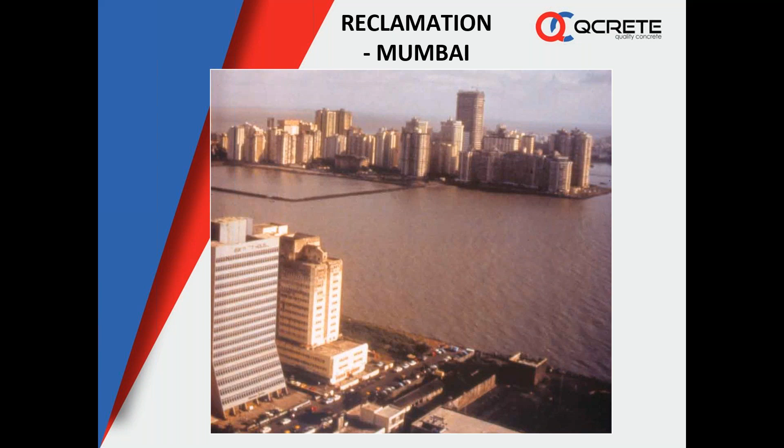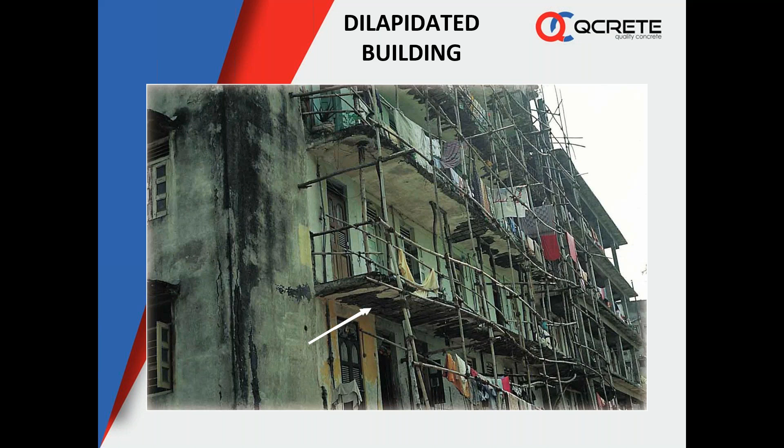And with those materials, with that type of quality of materials, we did the concrete. Now after 20 years or 30 years or 40 years down the line, we are bearing the brunt, because we can see a lot of repair and rehabilitation work. If you go around Mumbai, you can find a lot of repair and rehabilitation works, or sometimes it is being demolished also, because repair and rehabilitation becomes very costly. So it is happening there because of the poor quality of material availability, including cement, and even our specification was not ready to deal with that one.

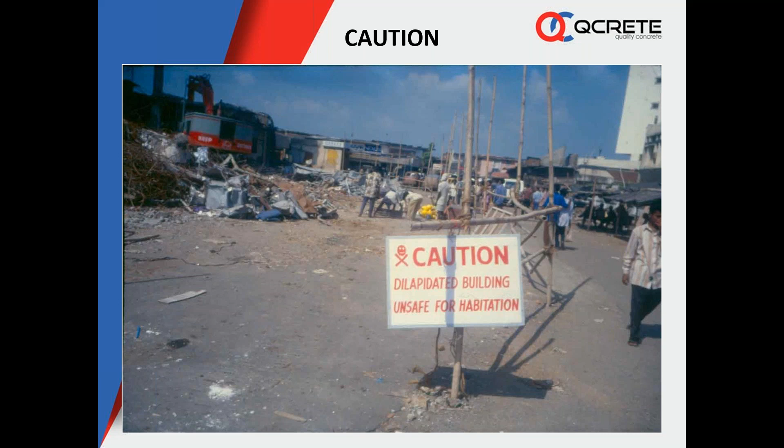Now I'll be discussing a few of these collapses which have taken place earlier, but nowadays we can see a lot of news coming up, a series of buildings getting collapsed. It's not a very old building, maybe 5 years or 10 years old. You have been listening in the newspaper. So whenever any building collapses, like this particular building, like Poonam Chambers only, in the 1980s, showing a picture of health there in the building, but it is not of the building, but of a company which was housed there.

So whenever any building collapses, a lot of rumors start. Earlier in the 80s there was no mobile phone, so people used to call up and tell that such and such building has collapsed, and then rumors start floating all around the town, and then slowly the municipality will wake up, and then they will institute a committee to go into the details of why this particular building has collapsed. The committee goes, examines, a detailed report is prepared, and then it is submitted to the municipality.

But has anybody heard any report coming out actually? We'll never find out the reason why this particular building has collapsed. All the judicial reports are being submitted, but it just gathers in the municipal office. Nobody bothers to reveal it actually. So what happens?

Buildings after buildings keep on collapsing, because the next building which is also prepared doesn't understand, and they create the same mistake, or some other mistake is created, and then the building collapses. Recently in Bengaluru, a few buildings have collapsed. Some committee has been set up to find out why, and I hope that inquiry report will come out.

Now this particular Poonam Chambers building had collapsed. Somebody said it is a 20-year-old building and it collapsed because of poor maintenance. Somebody said it is poor structural design, or somebody said that there was an overhead water tank there, and if somebody filled it with water, it collapsed. So all those rumors started floating.

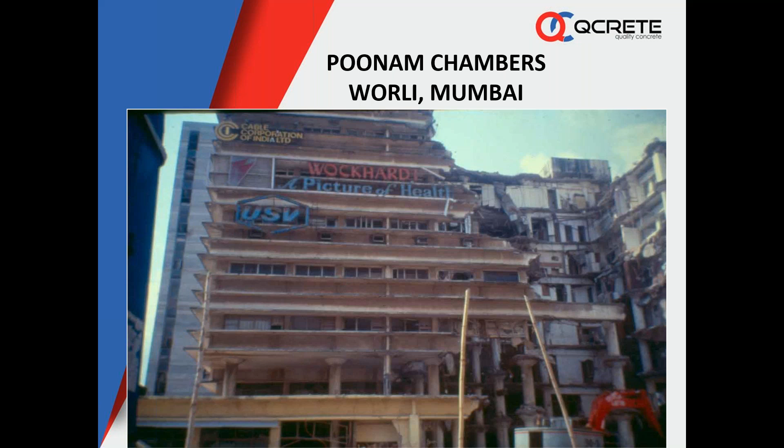So what can happen? Nothing but, on the 4th floor, when the entire configuration of reinforcement has been changed, the entire concrete building has to collapse. So this is one of the reasons why this particular building had collapsed.

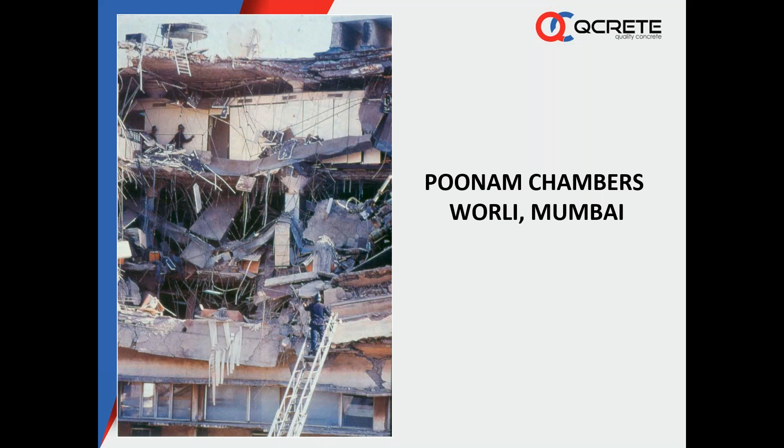Now you can see here is another view of that one. About 4 or 5 people had died in this particular collapse, including one young architect who had come to visit her friend. It collapsed during that time, and she also died in this particular collapse.

Another building I'd like to highlight is Shiv Chandan, Andheri, Mumbai. We got a call from a friend who was staying opposite to this building, built by the same contractor, because this building had already been declared unsafe and was on the verge of collapse. He was panically calling, asking what to do.

In this particular building, it's a 5-story building. On the ground floor, a bank was housed. As usual, in the morning when the bank employees came to work, there was a creaking sound coming from the building, as if it was made of a wooden structure. The employees refused to work and started complaining to the manager, who said, no, they are all making bahana, go back and work. But the employees refused to work.

They called the municipal office. The officials came down, inspected the building, and found that it was unsafe for habitation. Once a building is declared unsafe for habitation, it is mandated that everybody should vacate, because it can collapse anytime. Everybody vacated this building, and since it's a high-story building, the neighborhood was also asked to vacate.

A bakery fellow who had made enough dough thought he would make the bread and move out. Poor him - he and his 5 workers died in this particular collapse.

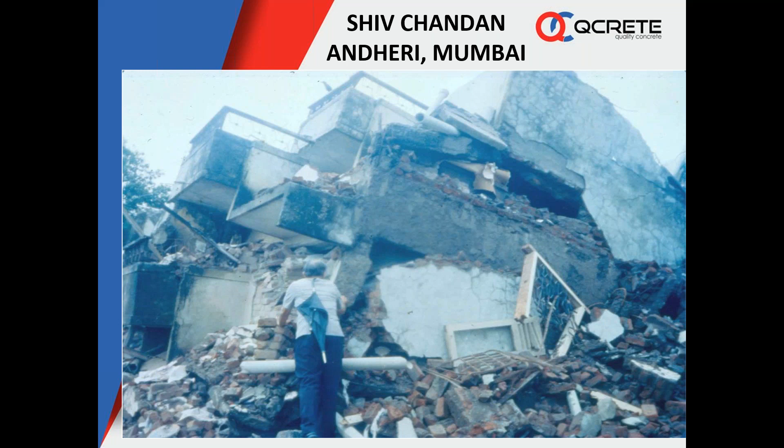So it's very important to understand the foundations, and whether the builder is going through the entire technical process for building a particular 5-story or 6-story or high multi-story building.

Now this is another building which has collapsed, Gangaram building in Bengaluru. Here the basement and first, second, third floor was already functioning. As usual, might be because of this building boom time, he also thought he will make 4th, 5th and 6th floor.

So 4th and 5th floor had been cast. When the 6th floor was being cast, concrete was happening, and the entire building collapsed. Since it was a live building, Gangaram's own bookstall was also there in the basement.

Around 90 people were trapped inside the building. Luckily, landlines were there at that time. It was live, people calling, please come and help. We were there, but outside the situation, you can see building to building, the entire area is filled with rubble, and nobody could approach with our machineries. We were not that well prepared with machineries to do fast evacuation. It was very difficult, and by the time it was reached, all 90 people had died.

So here you can see slab lying over slab. So what has actually collapsed here? The supporting system has actually collapsed. You can see the slab is lying over slab. The entire supporting system has collapsed.

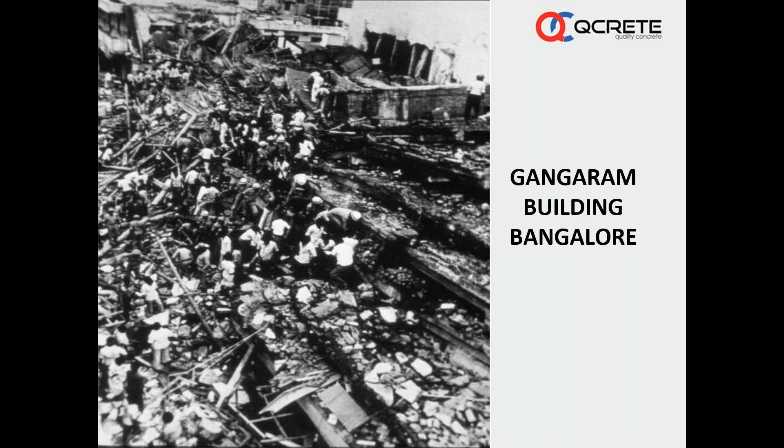So when we do supervision of a building, most of the time for the slab, everybody is there on top of the slab supervising it. But for a column, none of them is there.

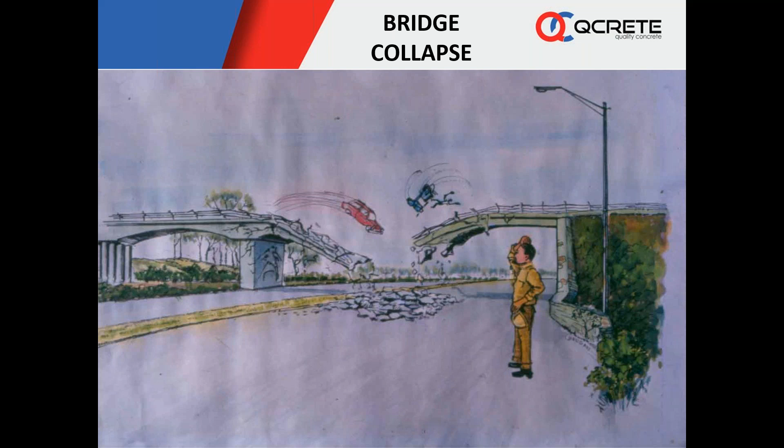Now you can see this young gentleman, a young engineer, after passing out of college, made a very beautiful bridge. He thought he'll show his grandson how beautiful a bridge he has made. Poor fellow, before he could even get married, the bridge collapsed. So such things have also happened.

You can see it's the Mandovi river bridge collapse. Here traffic was moving, and one fine day, you can see the bridge collapsed.

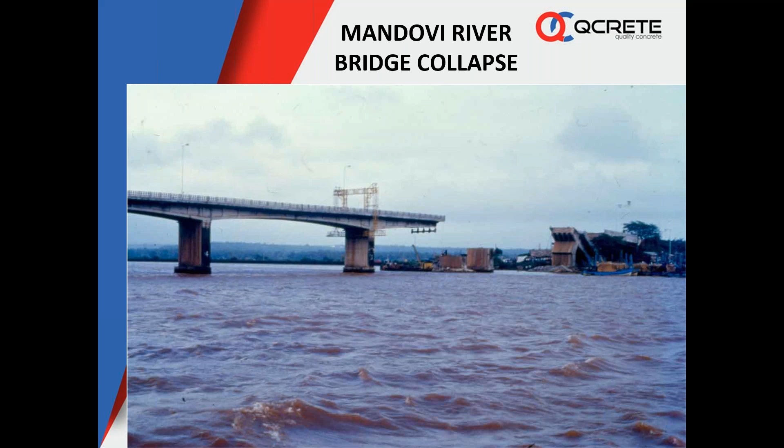And the reasons, you can see, are again pre-stressing cables. It is a coastal area, the bridge runs through the coastal area, with highly extreme weather conditions. We have to go for a higher grade of concrete, or we should go in for a blended one to avoid the corrosion effect. You can see the tendons are corroded, and due to that it gave way and collapsed.

Now let us understand why failures occur. There are 4 reasons to it: ignorance, greed, carelessness, and negligence are the 4 reasons why collapses take place.

Like ignorance - if you are an engineering student, during college itself you should attend various seminars where experienced people come and speak. At that time we don't give that much importance, but to remove your ignorance, that is the best way, since they give it as a capsule. So go through that, work for it, and you can remove a lot of the ignorance part after you come out of college and start working in the field.

Next is greed, which I did not explain because it is synonymous with civil engineering, and due to which there are reasons why some of the collapses are taking place.

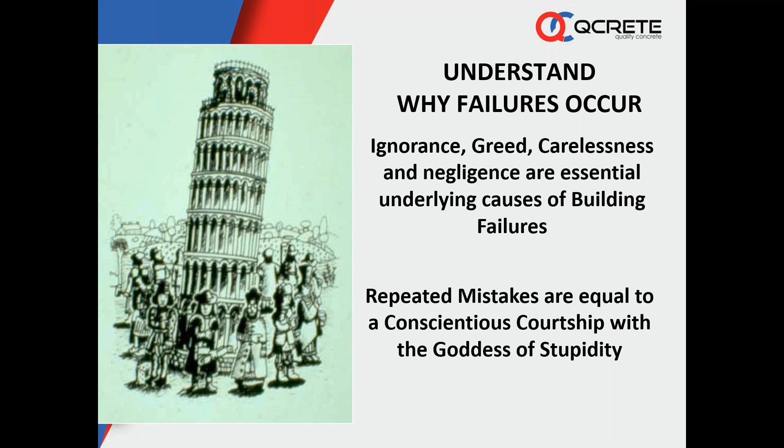So some of you understood, some of you have discussed how to solve the concrete problem. Some of you haven't actually. So shall I proceed with some of the elementary things we should look into for producing quality concrete.

The first step in concrete making is to make a good workable concrete. It is just like sending your child to a good school, a good college, teaching them good manners, good education. You are molding your young kid into a good human being. Same thing, you should know how to mold the concrete. How can you mold it good? It is by giving good workability.

Good workability means less entrapped air inside the concrete. So it will be easily able to place it, compact it, finish it. That is the purpose we have.

Workability and water cement ratio are two separate aspects. Even with low water cement ratio, you can make a highly workable concrete. Workability generally depends on the type of work. Suppose if you are doing road concrete, you require low workable concrete. For house work, slab work, you require medium workability. If you go for piling work, you require high workable concrete. So it all depends on the type of work; there is no connection with water cement ratio.

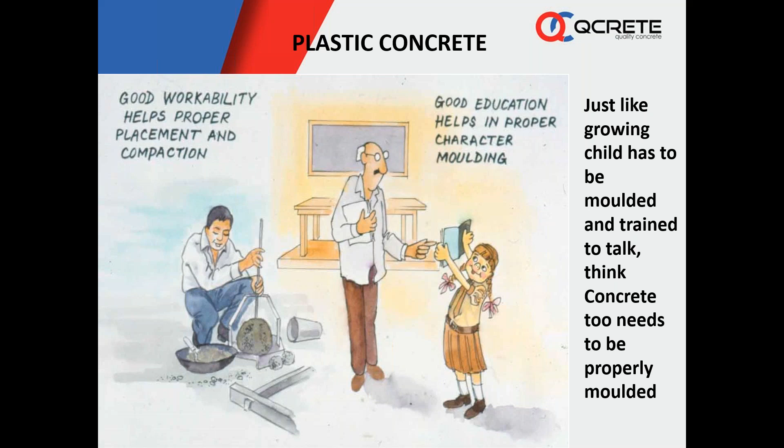Now if you see here, this concrete has a lot of entrapped air. You can see the concrete surface is not very smooth. The workability here is very low. It is very difficult to place the concrete, compact it, and finish it.

It's just like working under a boss who doesn't understand you. Either you should leave the organization, or you find a newspaper cutting, cut it, and put it on the boss's table so he sees it and leaves the organization. So there are only two alternatives. Similarly, if you are making concrete in this fashion, there are only two alternatives: either you stop making concrete, or you'll be making miserable concrete throughout your lifetime.

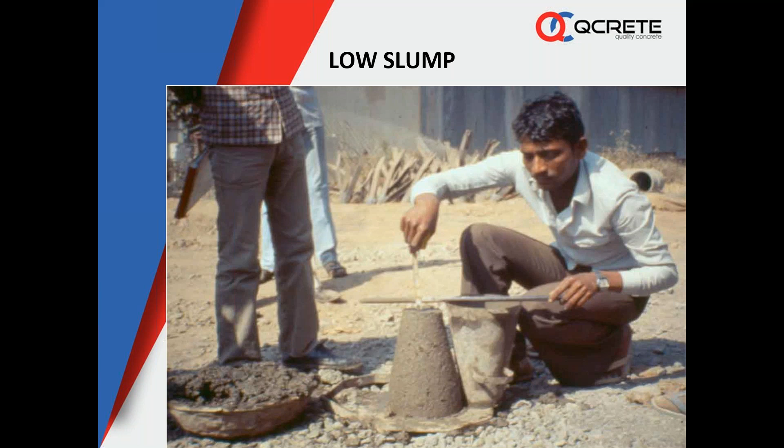Now, these are all inborn defects in concrete. You can see if you make concrete with low workability, you end up with segregation and honeycombing. It's a non-cohesive mix. A watery, lean concrete will all lead to this honeycombed, segregated concrete. You can see it here in the photo.

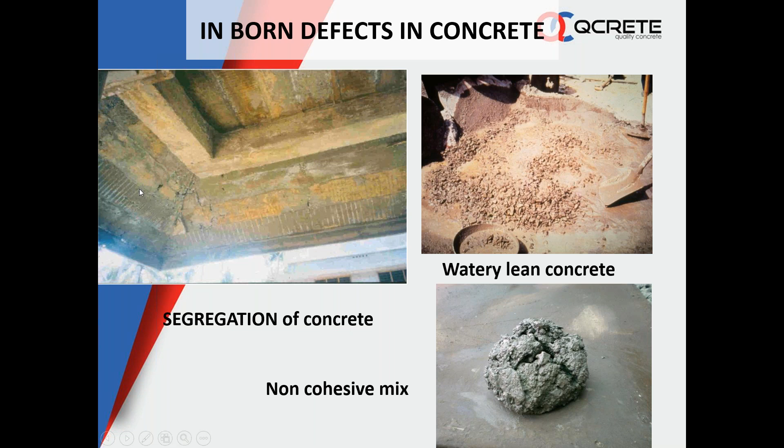Again, inborn defects in concrete. Now you've done the concrete, and the next day you come to the site and see the steel rods are exposed. It's not minor, it's major. Now what will you do? Natural tendency is to call the mason and ask him to plaster it so that before the client engineer comes, you can hide it.

But that is just putting powder on your face. Nothing is going to happen. In this aggressive environment, all the enemies of concrete will enter and attack the steel in that portion, which is the weakest portion where the honeycombing and segregation occurred. Water, moisture, along with chlorides, will enter and attack the steel, corroding it, making it the weakest portion.

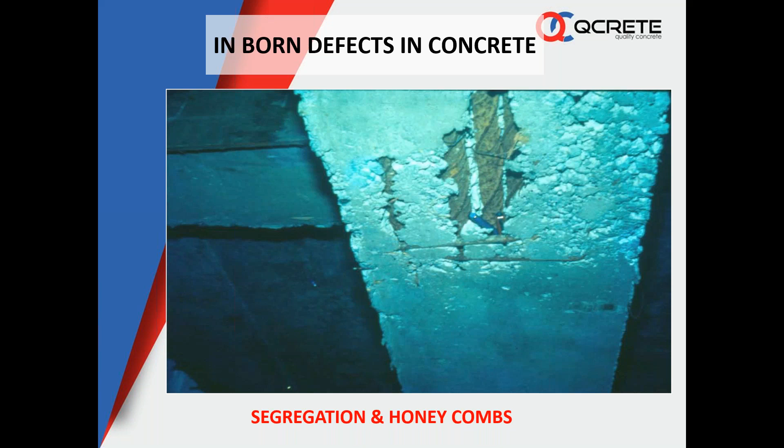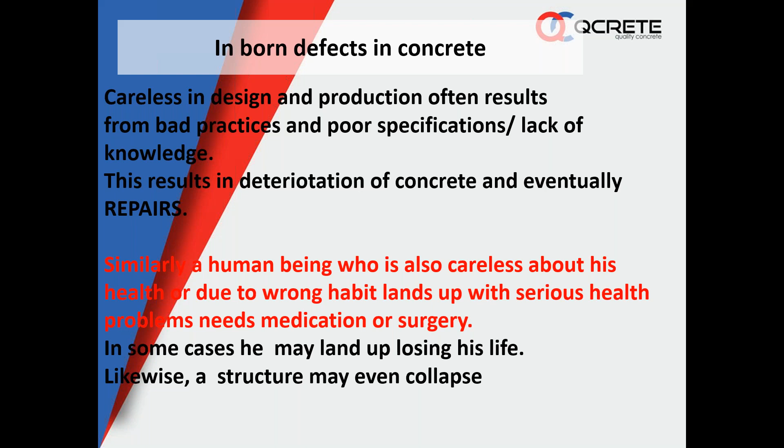So inborn defects in concrete, to compare with human beings, carelessness in design and production often results from bad practices, poor specification, lack of knowledge. This results in deterioration of concrete and eventually repairs. Similarly, a human being careless about his health or with wrong habits lands up with serious health problems needing medication or surgery, and in some cases may even lose his life. Likewise, a structure may also collapse. So right from design to production, to selection of material, to implementation at site and specifications, every part should be taken care of to produce a good durable concrete.

Same thing in concrete. Even though we have the best materials, if you don't know how to make a cohesive concrete, it can lead to segregation.

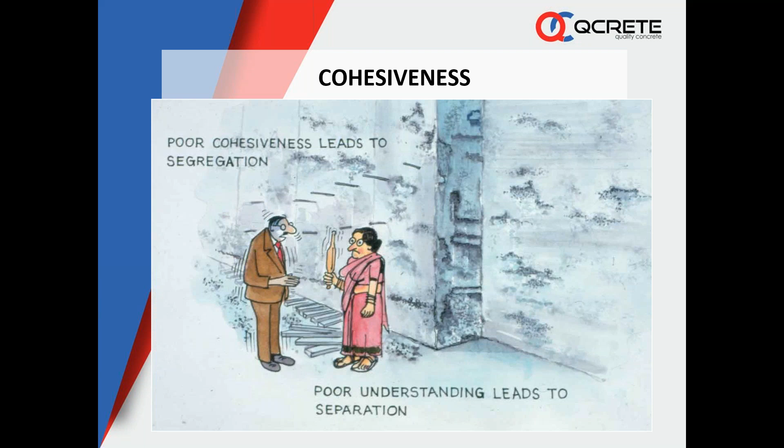Another test is that you take a ball of that concrete, throw it up in the air, and it comes back as a ball. That mix is a cohesive mix and you can use it at site. If you don't have a slump cone and want to check whether your mix is cohesive, you can go for this fast check. Otherwise, it is generally advised to have a slump cone to have a good measure of the workability and the cohesiveness.

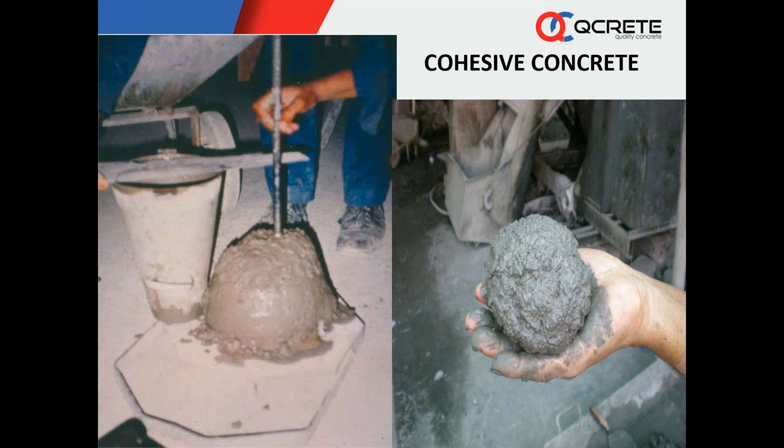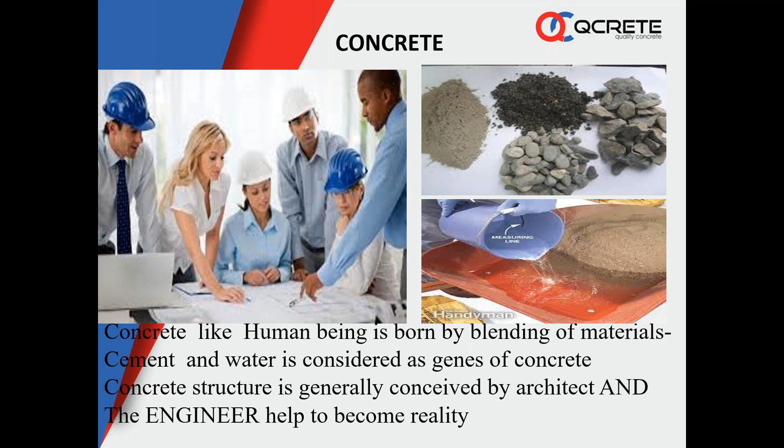Now, concrete, like a human being, is born by blending of materials. Cement and water are considered the genes of concrete. Concrete structure is generally conceived by the architect, and the engineer helps it become reality. Now, what is this concrete actually?

If you see the different parts of concrete, cement comes from stone. Coarse aggregate is also a part of stone. And if you see the sand, it is also a disintegrated part of stone only. So just like if you go to a shop to buy a fan, you don't get it as a complete fan, you get different parts. You bring it home, attach it, and then hang it as a fan. Same way, you are making an artificial stone as close as possible to the natural stone.

So all these parts we are bringing to a certain location, mixing it with water, and putting it on the top of the slab as a natural stone, to make an artificial stone.

So when you are making this, the coarser aggregates form the matrix. The gap in that should be filled in by the smaller aggregates. The gap in that should be filled in by the coarser sand. The gap in that should be filled in by the fine sand, and the entire matrix should be held by the cement paste, which also fills into the gap where the fine sands are. It fills up. So the more compact, the denser your concrete is, the closer it is to natural stone.

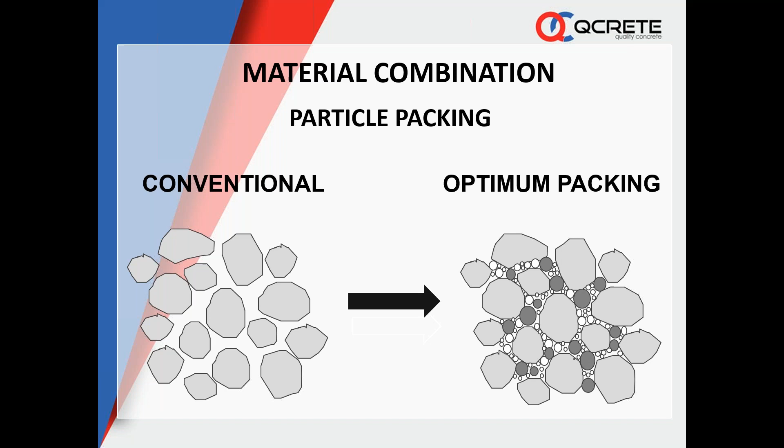Now you can see beautiful structures have been made, and nowadays we can see all the metros. In the metros, all the good pillars are there, where workable and cohesive concrete has been used to make beautiful structures. No plastering is being done, all the concrete is exposed. You cannot find a single place where honeycomb or segregated concrete has been used.

Now, any shape you see, your eyes pop out, in a human being. Same thing for concrete, the correct shape, the proper shape, the shuttering plays a very important role.

Like suppose if you are inviting me for dinner, what you do is go to the shop, buy the best quality material for preparing the food. Your wife prepares a beautiful, nice food also. But that same food is also served in a nice plate. So food and plate both should be good, then only you end up with a nice dinner. Same way with concrete: if your concrete should be good, your shuttering also should be excellent. Then only you'll end up with good concrete. So shuttering plays a very important role in concrete making.

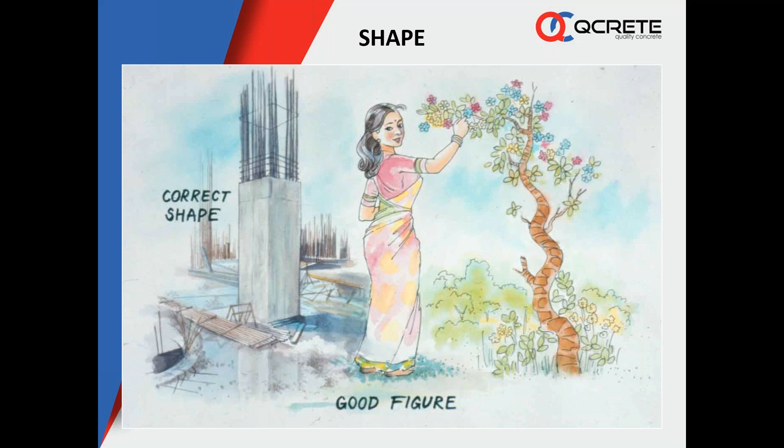Now you can see a good formwork designed by an engineer who knows about shuttering design, and then he prepares the formwork into the design, and gives it to the carpenter to scale it at site. Normally, what happens is that this is not taught in the colleges.

We are not aware of formwork design. We depend on the carpenters who design for us. Then what checking can we do? We cannot do any checking. So we are depending solely on the carpenters. He decides what is the thickness of the plywood, the type of support required, or the thickness of the rafters. All these things he only decides. We are only a mere spectator in this particular area. So no check happens.

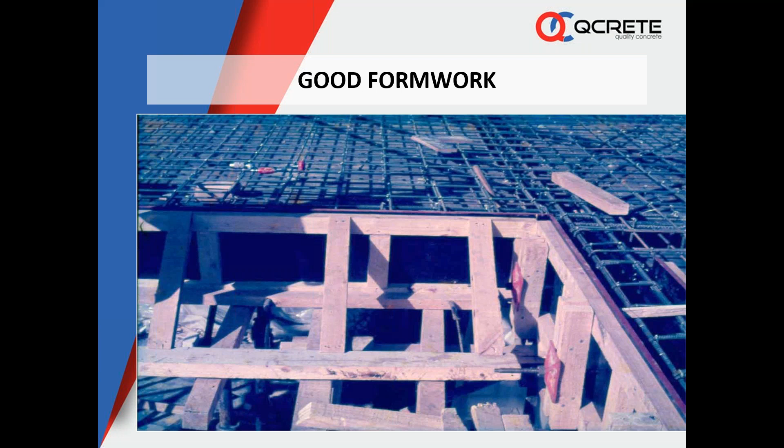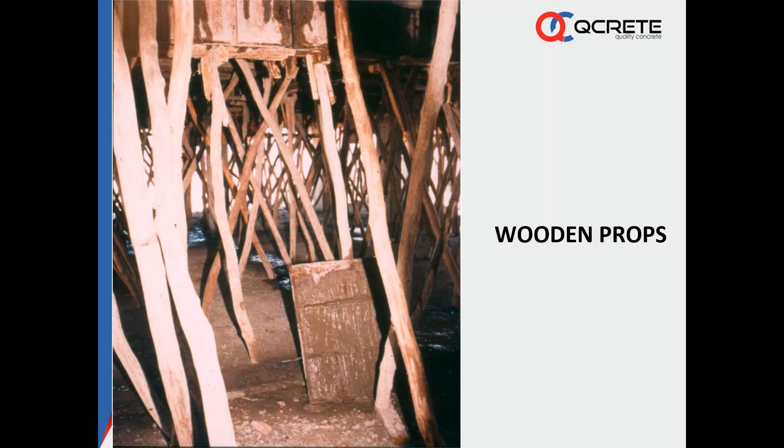Now, if you are a supervisor in this building doing the concreting, it is better you pray to God, because if the concrete remains on top, you're lucky. If it comes down, you're unlucky. You can see here none of the props are kept vertical. You tell the contractor, you told only 50 props to be there, put 100 props. But what is the use of having 100 props all at an inclined level? None of them will carry the load. One small area is enough to bring the entire slab down.

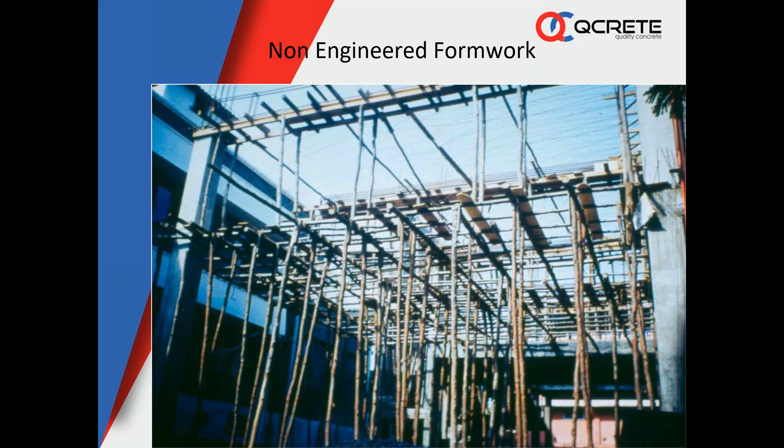Now here also you can see a non-engineered double formwork happening. Double shuttering is there happening, and this also leads to collapses.

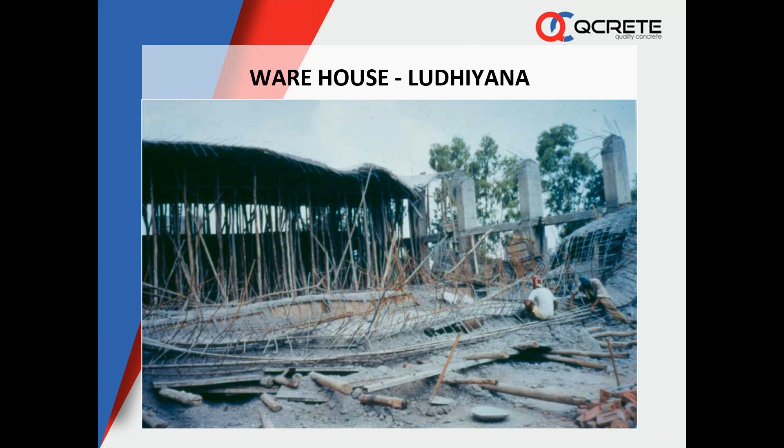Like in the Ludhiana warehouse, a contractor was awarded work who was used to doing only single-story buildings. He was awarded a warehouse where the shuttering height was double, and he did the shuttering, and allowed 3 carpenters to stay at the bottom to look if anything happens and inform him. Before they could inform, the entire warehouse slab collapsed, taking the lives of these 3 young carpenters who were below the slab. This is another view of that.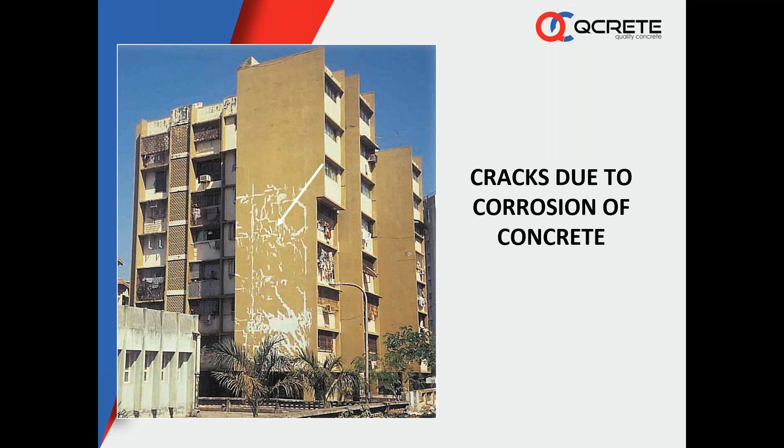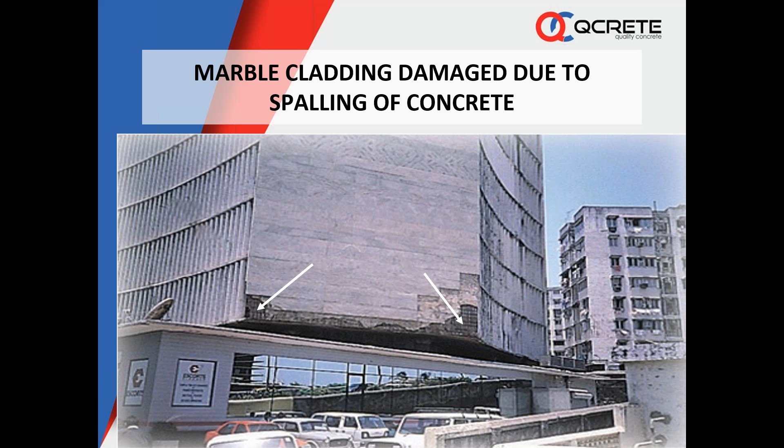Now you can see this particular structure in Mumbai, and now it is completely removed because what happened was that it was cladded with marble, and if you parked your car below this structure, by the time you come back, one of the marble pieces must have fallen down. It must have fallen on your car and changed its shape. So this particular building, because of the dangers, they had completely removed it.

So good strength - which all engineers, we all like. As engineers, we are very happy to have the strength parameters. We look for it now. Even nowadays, we have ladies showing strength in the WWF.

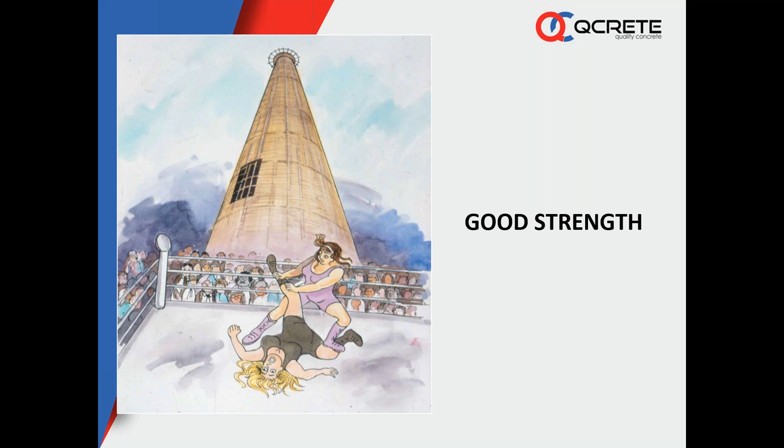Now, the concrete - this man sitting under the concrete - cannot keep secrets of bad work. You tell something to your wife, and after some distant time, you can hear it from your relative what you told and what you didn't tell. So just like that, concrete also cannot keep leaks. They cannot keep secrets of bad work.

This man sitting under the umbrella is showing the weather forecast. It's heavy rain, but he need not be told that, because he's already sitting with an umbrella inside the house.

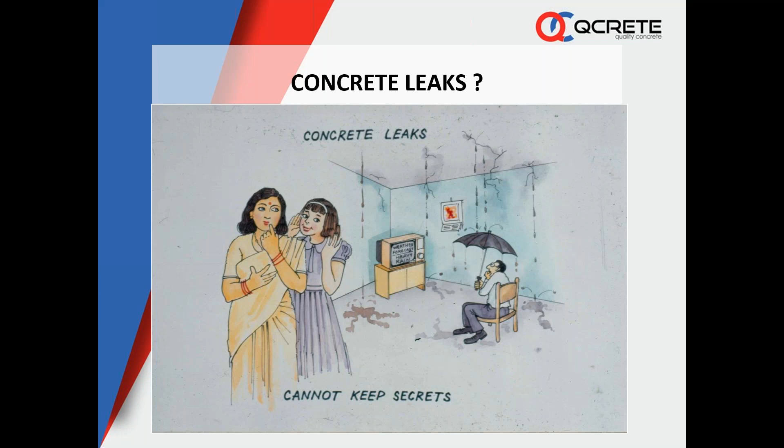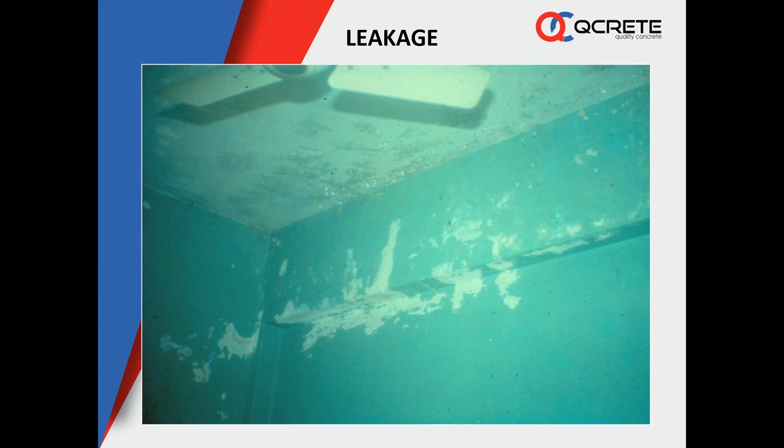Now what happens is that after a few years of construction, you can see some dampness coming on the roof. You can see the fan hanging there right now. After a few years, if you don't do any repair work, now the fan is not there. Concrete along with the fan comes down one fine morning.

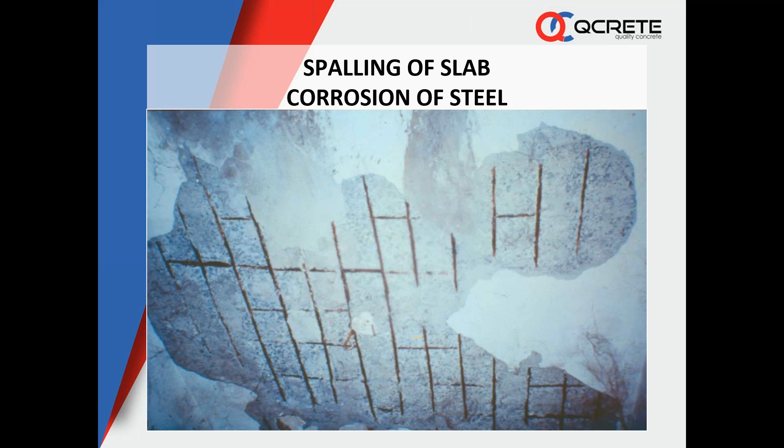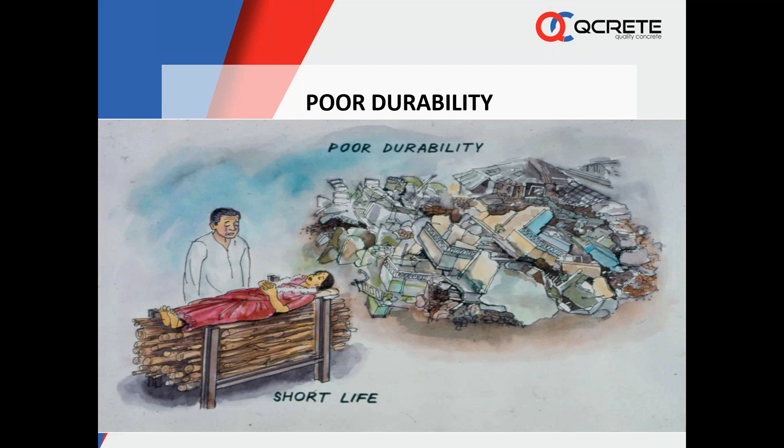So that poor durability of what we are constructing - we say that we have to build a structure which should last for 100 years. Some buildings may last for 10 years or 15 years or 20 years. It's poor durability, just like losing a life partner very early in life actually, short life. Sometimes if you don't build your structure properly, it also leads to collapse at an early age.

So a holistic approach to durability of reinforced concrete lies on 4 strong pillars. I always say it's structural design and detailing. Then we have the material properties - we should understand what type of materials we are using. Then we have the mix proportions - you have to go in for proper mix designs. Then mixing, placing, consolidating, and curing. If you follow all these steps religiously, we should end up with good durable concrete.

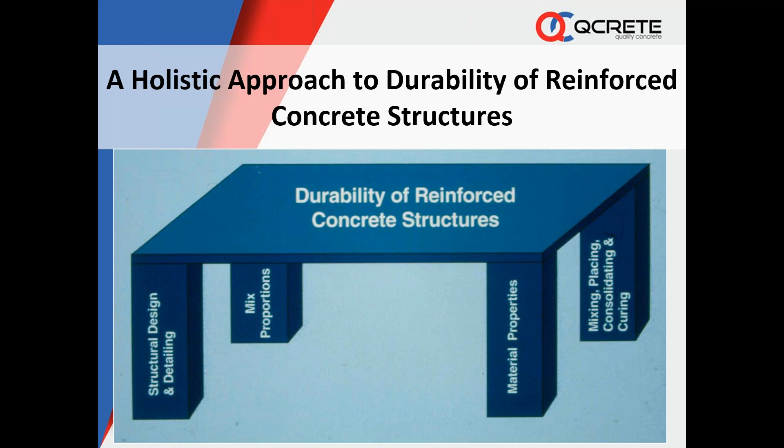And when he's trying to cast the particular structure at site, he didn't find any gap for a vibrator to go inside or for the concrete to go inside, ending up with a honeycomb in the most important structural junction. So every detail, right from the detailing stage itself, everything should be properly marked - from where the concrete has to go, from where the vibrator should go in these important structures. Then only, right from detailing stage to compacting and finishing, we have to look into it to get durable concrete.

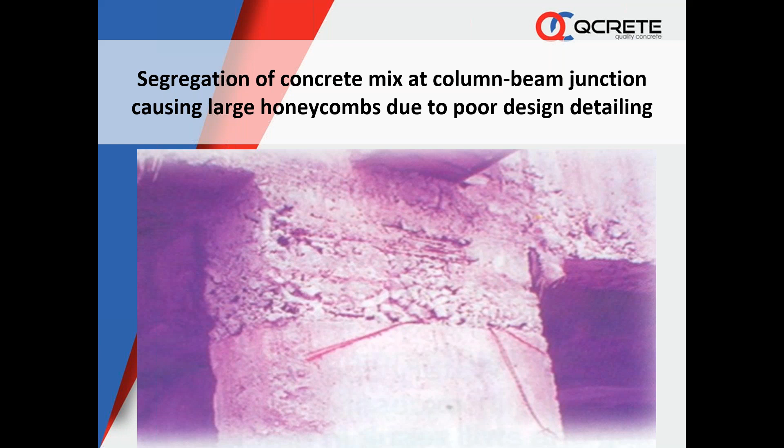Now we have enemies of concrete, just 4 enemies. I'll be covering this in brief. Water is the main source for making concrete, but it becomes enemy number 1 after the concrete is made. Along with the water, chlorides also enter, due to which the concrete can deteriorate. Others are carbon dioxide and sulfates.

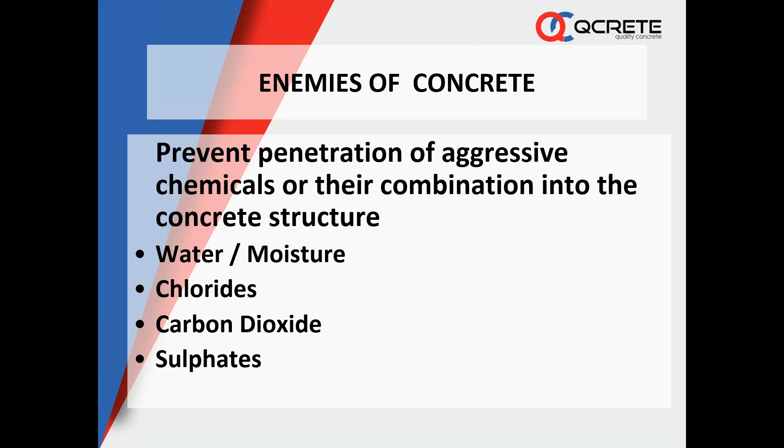So water or moisture. Suppose if you are making a house in Bengaluru, the concrete may last for 20, 25, 30 years, good, with the same M20 concrete. And the same concrete, if you are making it in a coastal area like Cochin, it may last only 10 years or 5 years. Why? Because there are a lot of chlorides in the atmosphere, and the chlorides along with the water enter through the capillary pores inside the concrete, and attack the steel, causing rusting of steel to take place.

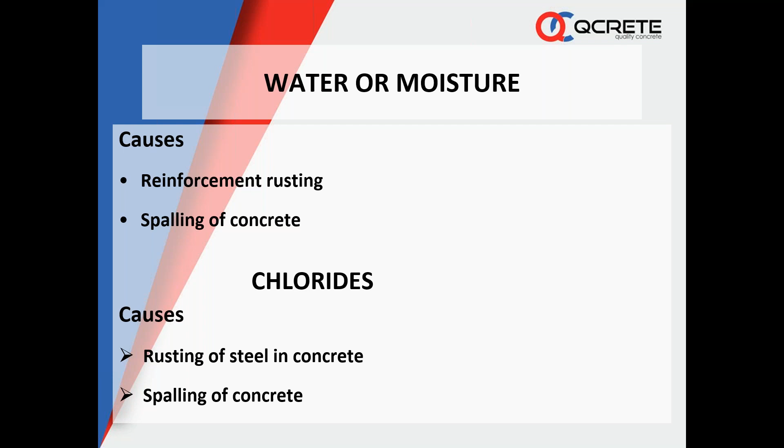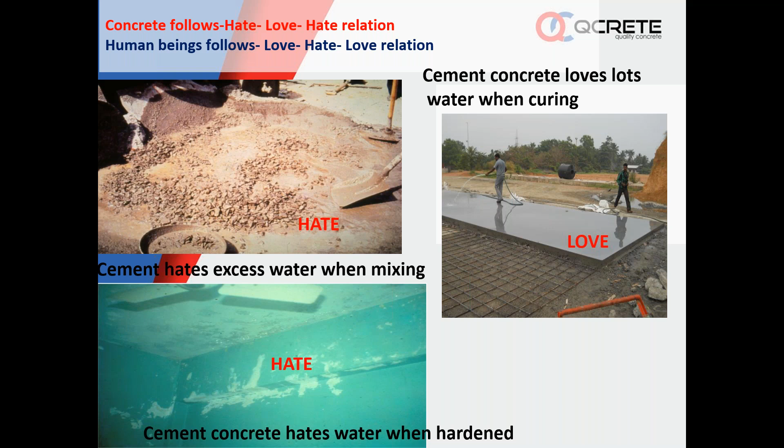And human beings, when they make concrete, they follow the same pattern. Love-hate-love relation. When the concrete is made, they love to add more water. After the concrete is made, when curing is required, we hate to add water. After that, the structure is exposed to an aggressive environment. Whereas concrete follows a hate-love-hate relation: at the time of making concrete, they hate to add water, but they love water after the concrete is made, since curing is required after the concrete is done. They love, and then hate, the aggressive environment. So that is the issue when we are making concrete.

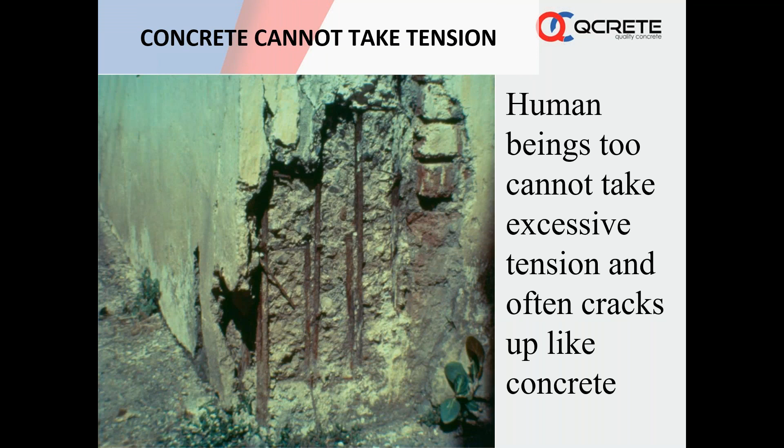So concrete also cannot take tension like human beings actually. We cannot take excessive tension and often crack up, like concrete.

So what happens in 1 year time? We are having 2 monsoons, and water has already entered your concrete. It is just like blood traveling through the capillary pores in your body. The water travels through the concrete body, and it may not show immediately at the bottom. It keeps on traveling, and some unhydrated cement will be there. It starts cracking up, then the crack bit forms again. Next monsoon moisture enters, and slowly it reaches the steel.

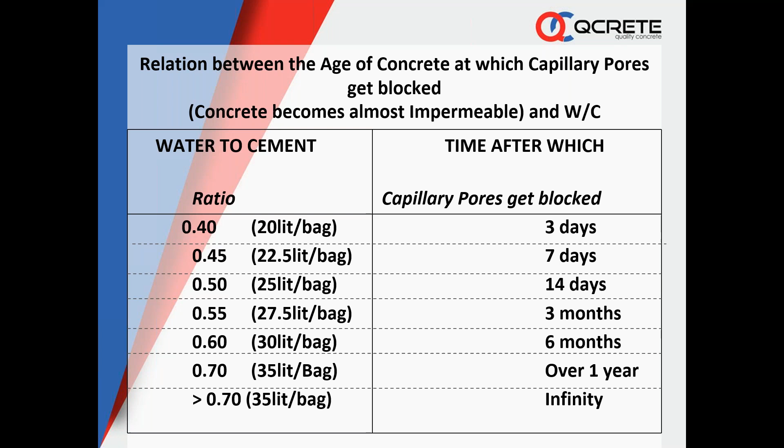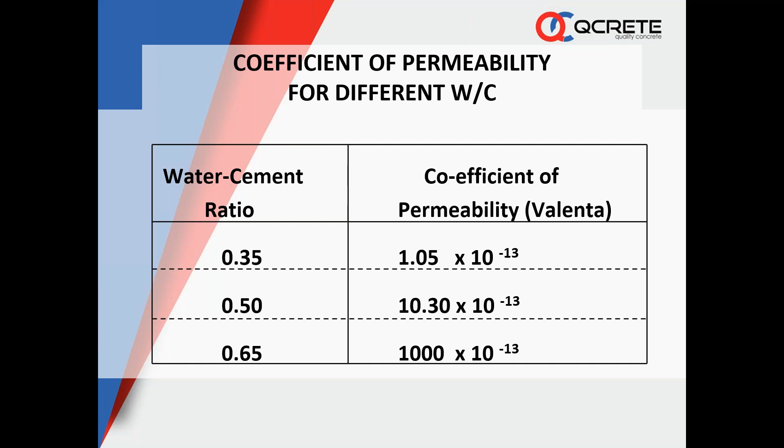So water cement ratio, the importance of water cement ratio: at 0.35, your coefficient of permeability is 1.05. As soon as it is increased to 0.5, it increases 10 times. As soon as it increases to 0.65, it increases 1,000 times. So while preparing concrete, we have to be very, very careful with our water cement ratio.

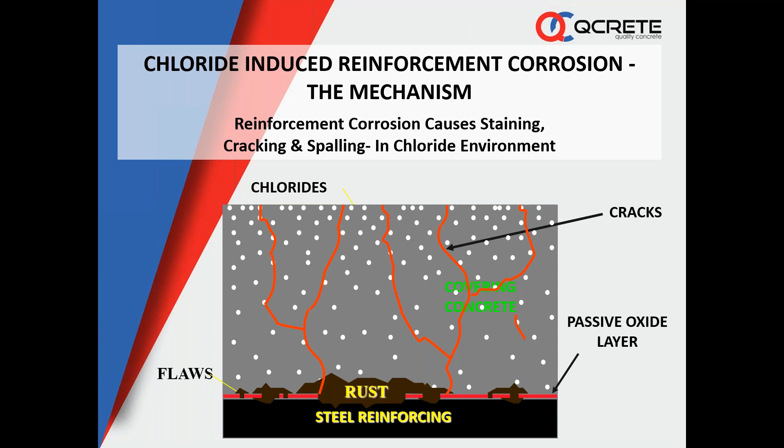Now you can see here the cracks which get induced. As I told you, slowly the capillary pores get joined, moisture enters, and along with the moisture, chlorides also enter. It comes and touches the steel at a particular portion, then rusting starts to take place. This is a simple electrochemical process which takes place here. As soon as the moisture touches, along with the chlorides, a particular steel ring, that portion will act as anode, and the rest of the steel will act as cathode. The concrete will act like an electrolyte. Ferrous gets converted into ferrous oxide and hydroxide, and slowly the rusting takes place.

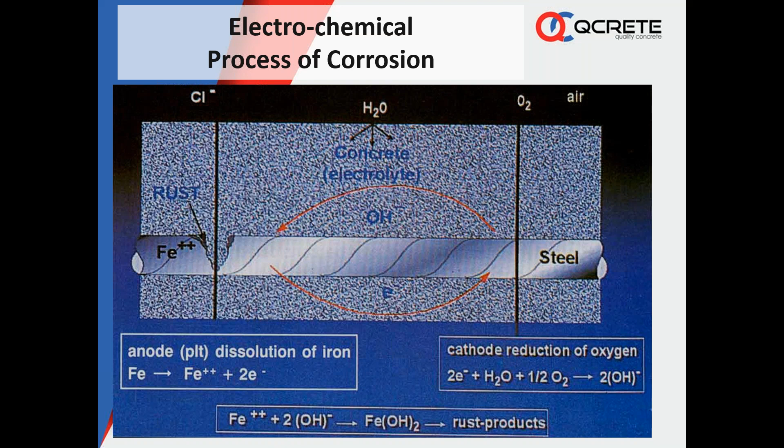And you can see the size of steel increases 6 to 6.5 times. Due to this, the cover portion, which is the weakest portion, comes down. You can see here, this is the reaction which takes place, and this is the size which increases in volume - around 6.5 times it is increasing. The steel size increasing 6.5 times causes the cover portion, the weakest portion in concrete, to come down.

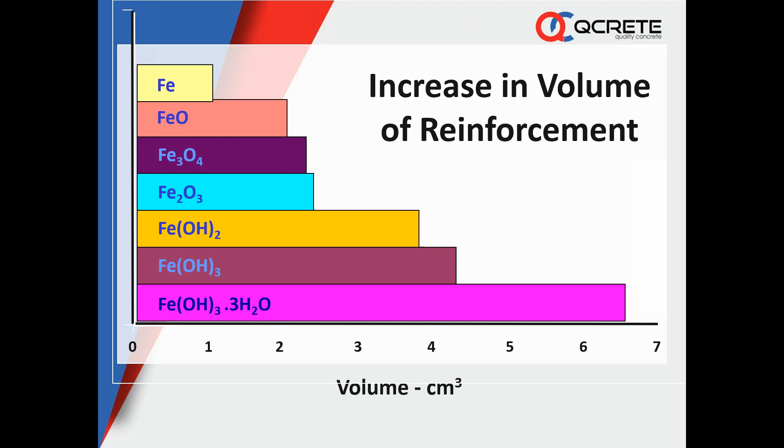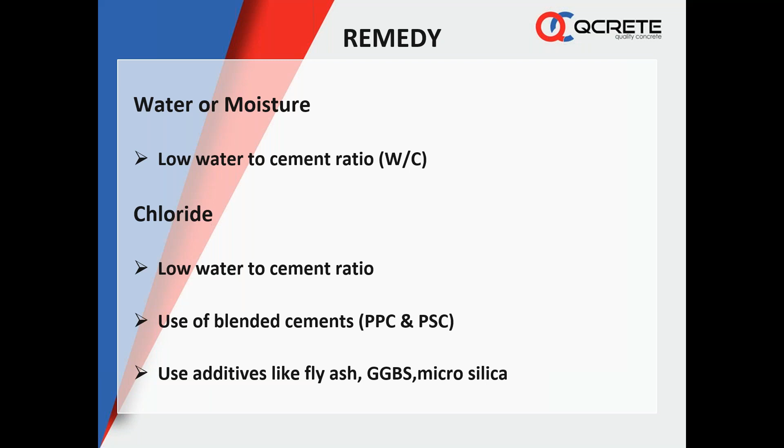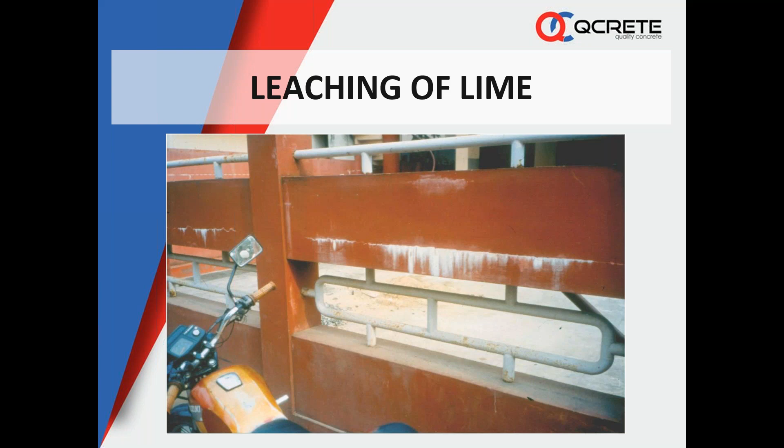I will come to that - you can see here one particular structure, a handrail, where through the capillary pores the moisture has entered, and the unhydrated cement comes out as leaching. White patches which are seen are all unhydrated cement particles inside the concrete body, which react with this moisture and come out, leaving bigger capillary pores inside the concrete body. The next time moisture enters, the crack widens, and it reaches the steel.

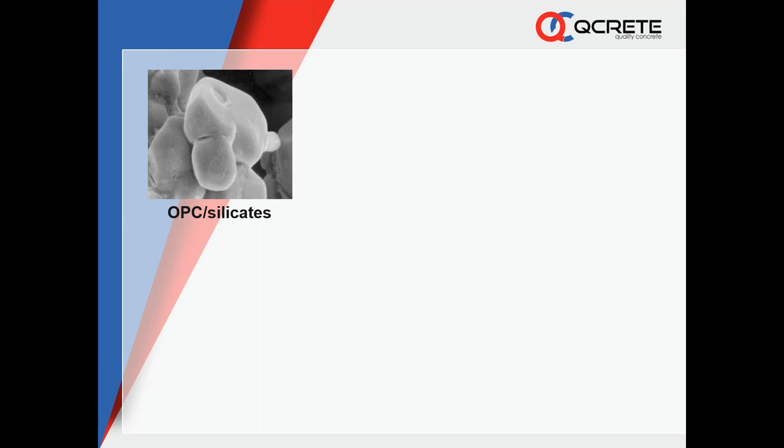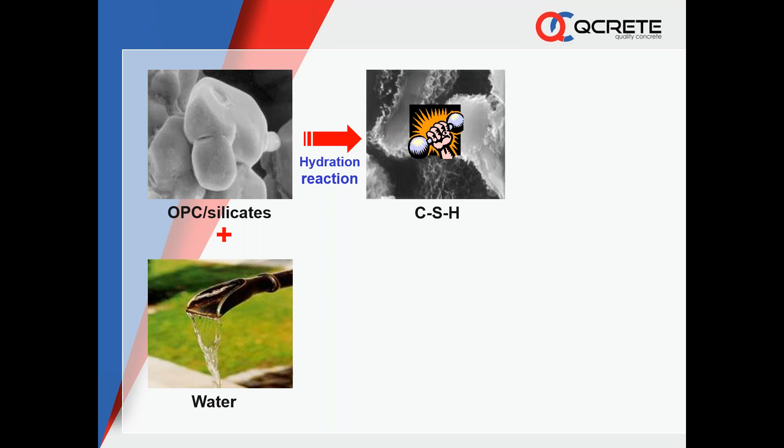Now you can see here, small - if you are making concrete with ordinary Portland cement and water, you get a C-S-H gel. We feel that the concrete we have made is very strong. But actually, the C-S-H gel that is formed is only up to around 70%. Due to this, we have excess lime which leaches out, making your structure weaker.

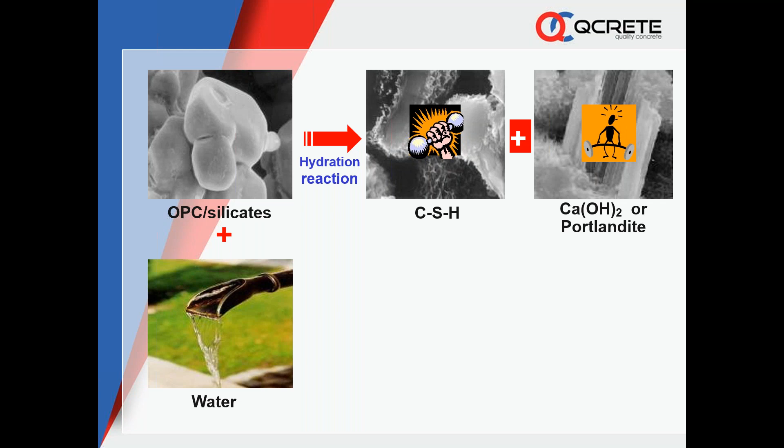Weaker. Actually, over a period of time, excess lime leaches out and makes the structure weak. The remedy is that you can add fly ash. This excess lime will start reacting with fly ash and closes the capillary pores, making your concrete denser. This is a secondary reaction which takes place.

What happens is that now the C-S-H gel, which earlier was only up to 70%, goes up to 95%. If 95% of the C-S-H gel is formed, then very little portlandite is available to come out, making your concrete stronger and more durable, using either fly ash or GGBS. This secondary reaction closes the capillary pores, making your concrete denser.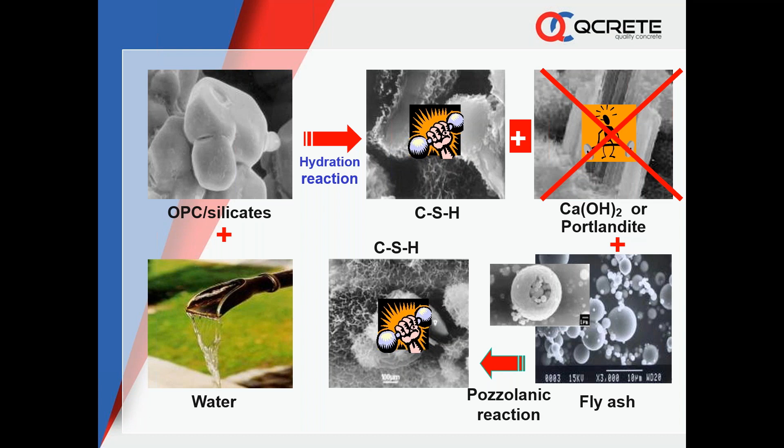Now the third enemy of concrete is carbon dioxide. As I told you earlier, the pH of concrete is around 12 to 13. Over a period of time, all the concrete which is protruding outside, like balconies, faces increasing carbon dioxide levels as pollution increases in the city.

So what happens is carbonic acid forms on the concrete surface, which reduces the pH. It reduces it and goes beyond the cover portion, bringing the pH down to around 8. Then the steel gets exposed and corrosion starts taking place.

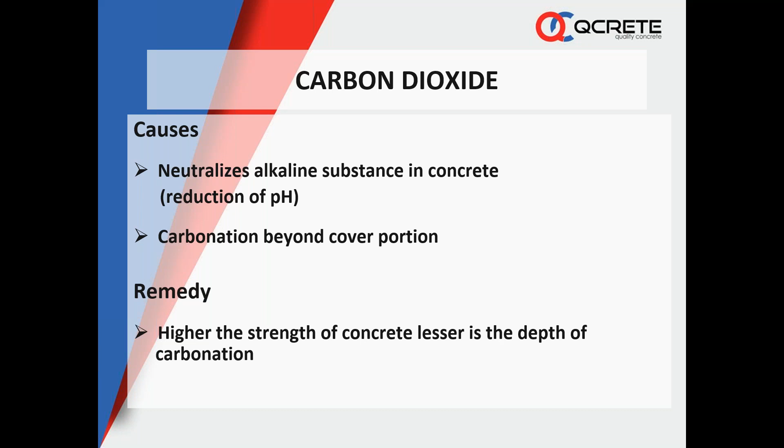The remedy is that we have to go in for higher and higher strength of concrete. Now you can see here, earlier I had shown all the balconies which are protruding outside. This is basically carbonic action which has taken place - carbonic acid falling on the concrete surface, which has reduced the pH.

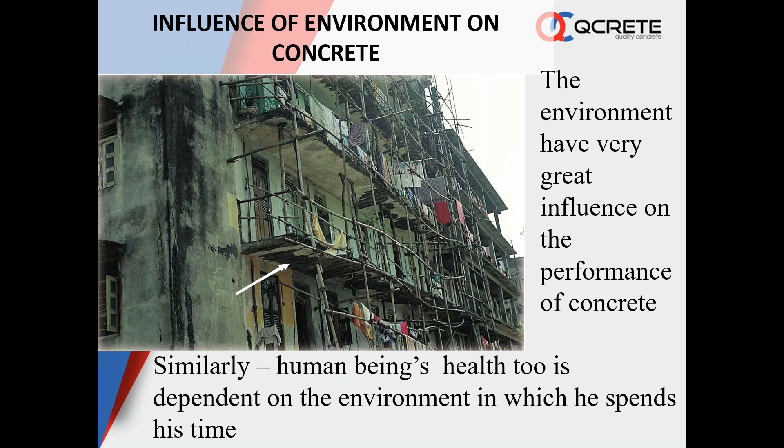That steel is exposed because the cover is only 20 mm, or 15 to 20 mm that we are providing, and the carbonation exceeds that cover. You can see here the estimated 20-year carbonation depths for different grades of concrete.

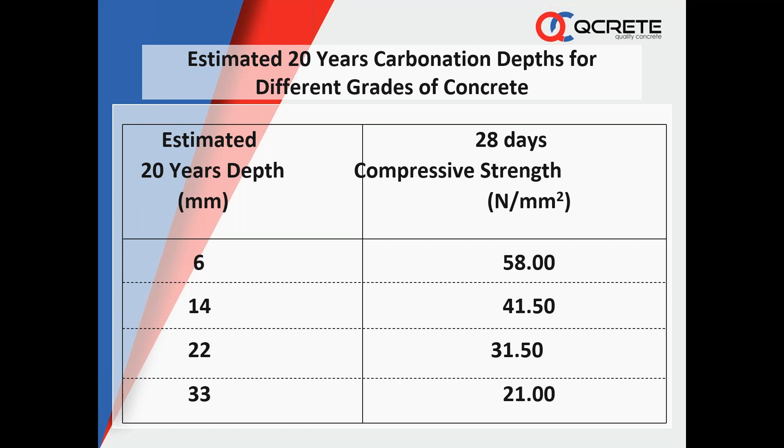The estimated 20-year depth for a concrete produced at 58 Newton per square millimeter was only found to be 6 mm, whereas for M20 concrete, after 20 years, the estimated depth is around 33 mm. So it has gone beyond the cover portion, leaving your steel vulnerable for corrosion. We have to go in for higher and higher strength of concrete to avoid carbonation.

The last enemy of concrete is sulfates. For sulfates, sulfate resistant cement has to be used. There are 4 phases in concrete: C2S, C3S, C3A, and C4AF. Of these, C3A is the most reactive element, and in ordinary Portland cement it is around 8%.

So what happens is that C3A combines with sulfates to form a compound called ettringite, and this gets into the concrete. It has an expansive nature and starts cracking the concrete. So what is the remedy? You have to use sulfate resistant cement.

Sulfate resistant cement is nothing but reducing the C3A, minimizing it, so that with less C3A the reaction will not take place, and your concrete will be safe.

But what happens is when you reduce the C3A, suppose in a coastal area like Kerala, for 100 parts per million of sulfates there are 10,000 parts per million of chlorides present. If you reduce the C3A, actually C3A reacts in a way that repels chlorides from entering the concrete. So if you minimize the C3A, all the chlorides can enter your concrete and corrode your steel reinforcement.

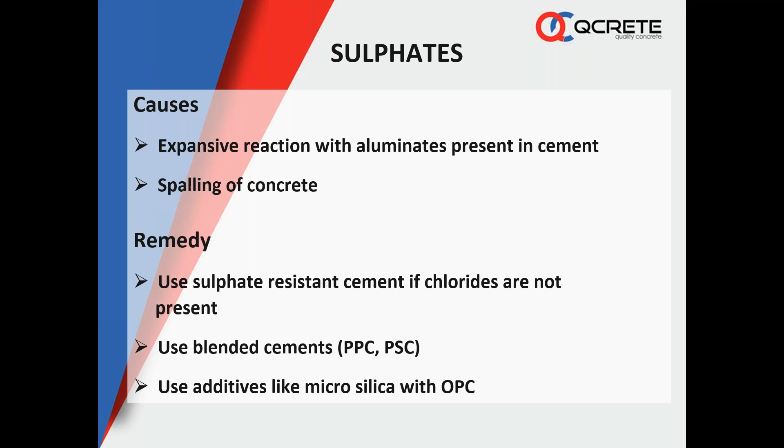Now you can see here chloride diffusion in various types of cement paste having constant water cement ratio of 0.5 at 25 degrees centigrade. The best performance was slag cement, 35% OPC and 65% slag, giving 0.41. Second best was Pozzolana cement, 70% OPC and 30% fly ash. OPC, this sulfate resistant one, is the least preferred in the chloride environment.

So we can go in for the blended cement, or you can blend it externally. Ordinary Portland cement you can have, and fly ash or slag in another silo, do the mix design and blend it externally in the right quantity.

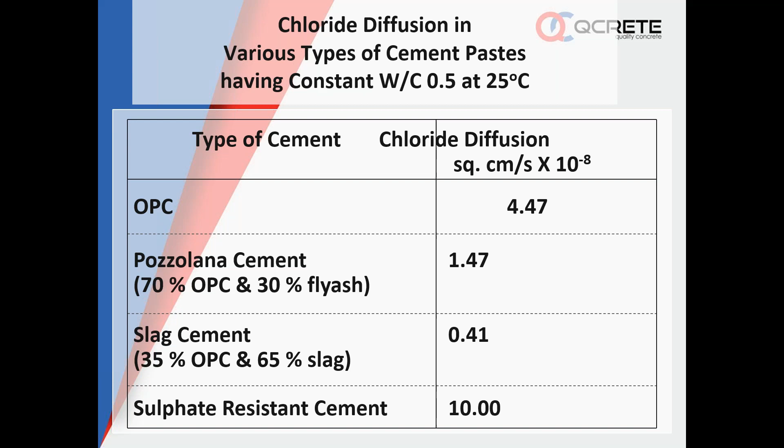So this is one particular concrete box type structure which was done for Tata Electric Company. It's a 2000 cubic meter concrete box type structure. It has to be sunk around 15 kilometers inside the sea. Now you can see it is being towed by a boat.

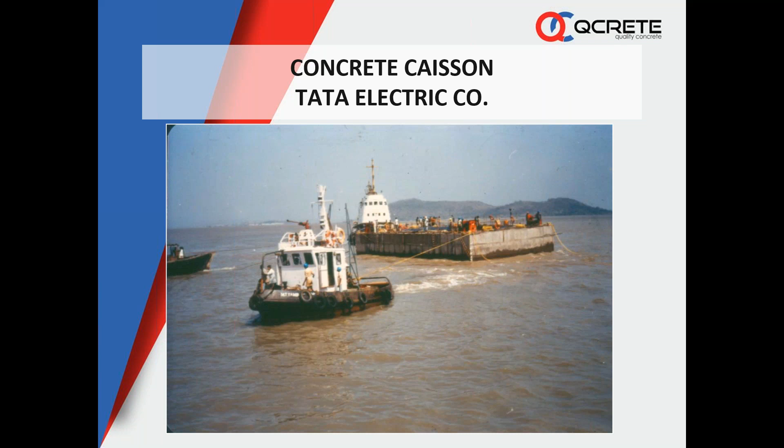Concrete is made waterproof with proper study of material, proper concrete with proper expansion and construction joints, so it can be towed. Otherwise, you would have to make a long jetty up to 15 kilometers, push and pull it up to that location and then sink it. Here it is easily being towed there, which shows the concrete can be made waterproof.

Now, for all this to happen, we have to do our homework properly. You cannot be sluggish, you have to act in the field. You have to be very precise in doing each and every step I touched upon to get a good concrete. Otherwise, you will end up with such type of structures.

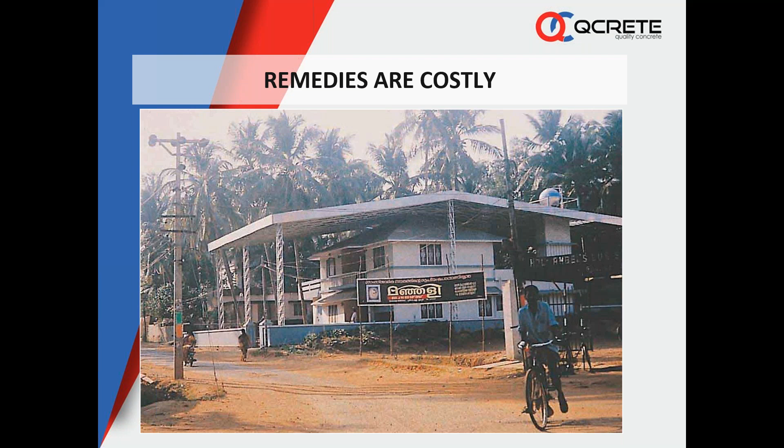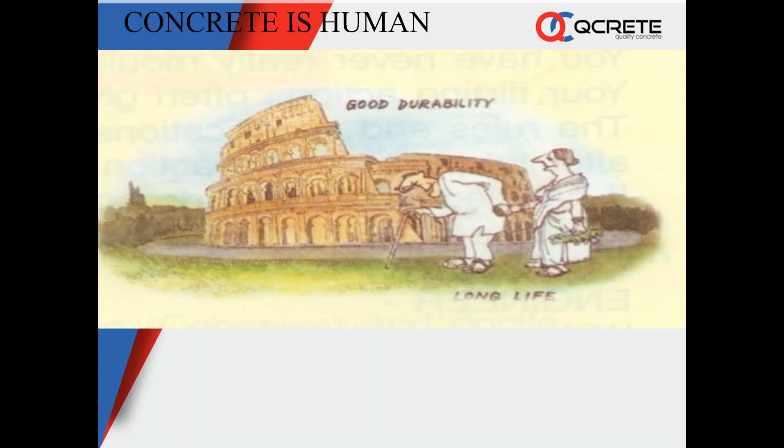We have to get up and act, and see that all the concrete we are making serves the purpose. So we have to bridge the gap between good theoretical knowledge and practice. A lot of effort is required to make beautiful structures. Let us bridge the gap and build beautiful structures which give a long lasting designed life, the life we are designing for, we should get from the concrete.

So concrete is just like a human being. It needs care in childhood, good supervision in youth, and sufficient maintenance in old age. With all these things taken care of, you can have a long life with your life partner.

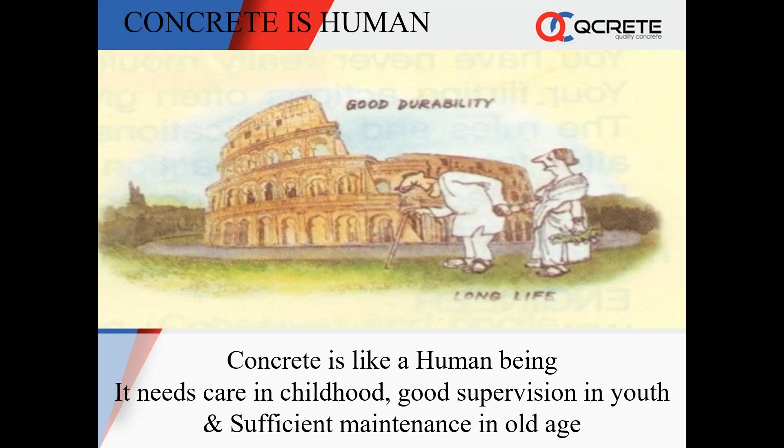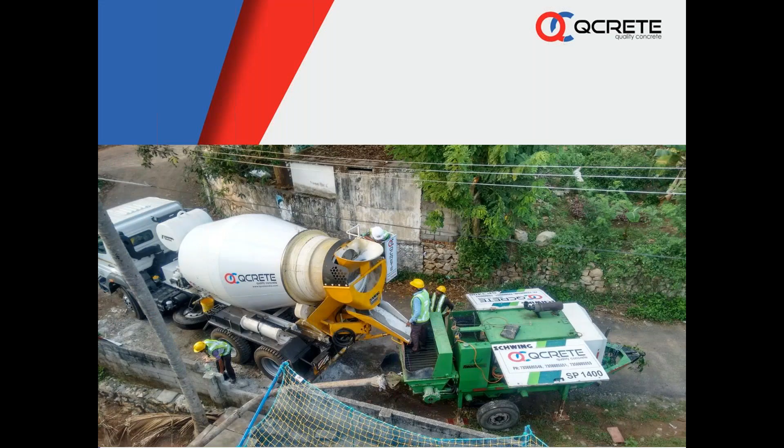So thank you. Concrete is so human, isn't it? Let us have romance with concrete. Thank you, and also thanks to my mentor and guru CM Dodi for his support and guidance. Thank you ICI Mangaluru participants for your presence and good wishes. Thank you very much.